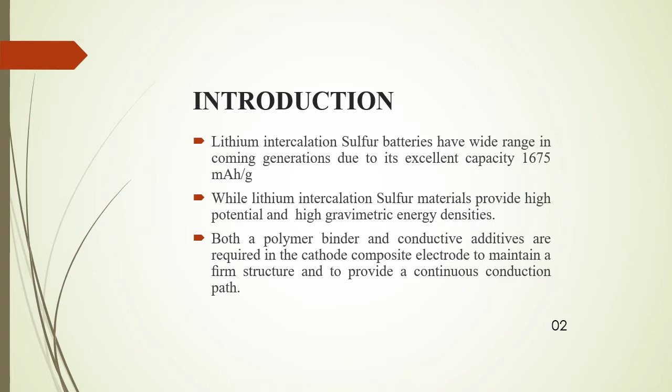So it works on the principle of a binder, which is a polymer, and conductivity additives, which I used is C65. And by combining all these I prepared the sulfur cathode to assemble the battery. So this is how it works, and let's see what the mechanism of the lithium sulfur battery is in the coming slide.

So this is the slurry preparation, in which we have four main points: active material preparation, binder material, solvent, and conductivity material. To prepare this slurry, we have four parts. So first we have to prepare the active material. I will explain how I prepared the active material for the lithium sulfur battery.

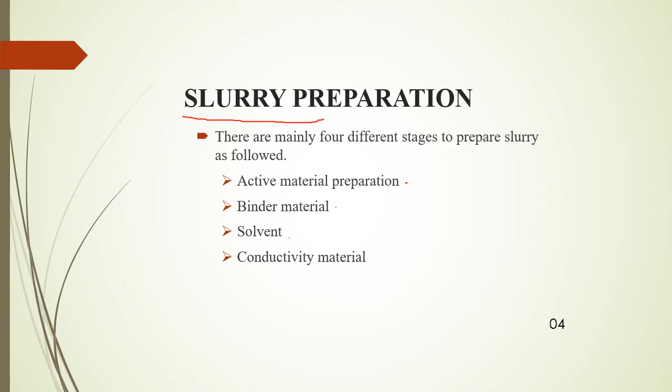In this active material preparation, initially I took carbon, which is ACS, and sulfur in the ratio of 3:7, and I blended it very well using a blender until the sulfur, which is yellow particles, was well mixed into the carbon particles, and then I used a furnace for 12 hours at about 155 degrees Celsius at 10 degrees Celsius per minute,

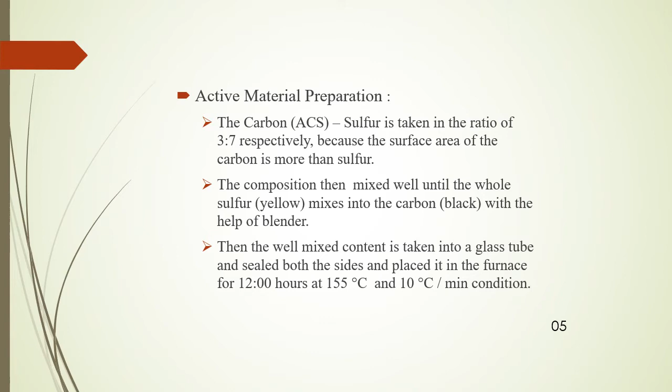rising temperature. In this condition, I used the furnace and kept the active material, which I blended homogeneously in the ratio of 3:7. I kept this composition in the furnace for 12 hours. After that, the above-mentioned binder material and solvent.

So finally the slurry. I prepare the slurry by combining all the above three in the ratio of 7:2:1, where 7 is the active material composition, 2 is the conductivity material, and finally 1 is the binder, for which I used PVDF.

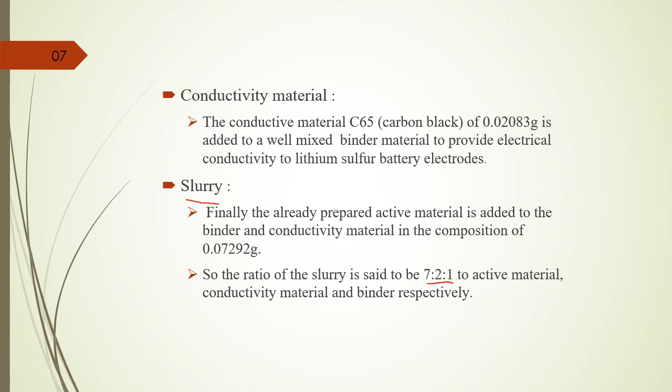So this is how I make the slurry, by using the mixer again for 30 minutes to mix this composition well, and we will get a sticky liquid type slurry, and I use that slurry in the further process. The further process is coating. Coating uses the slurry which I prepared earlier. I coat it on aluminum foil.

So I take aluminum foil of 20 micrometers, and the slurry which I prepared, I'll coat on the aluminum foil, and I use the scraper machine set to 80 mm diameter, and I coat on the aluminum foil using a speed of 15 mm.

The aluminum foil is allowed to stick on the scraper, and I keep the slurry I have prepared on the surface of the aluminum foil and allow the scraper to move over the slurry, so that the slurry is uniformly coated on the aluminum foil with 80 mm diameter, and we get the aluminum foil coated with the slurry.

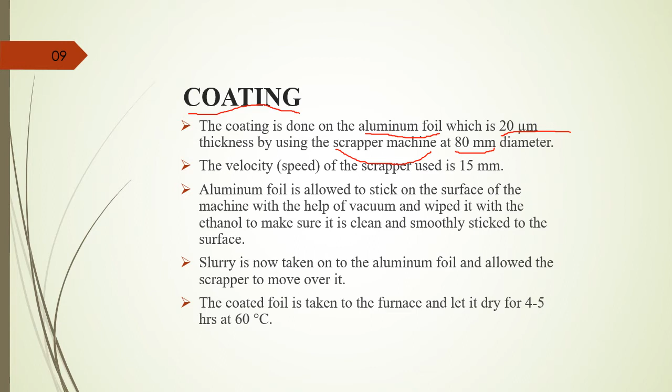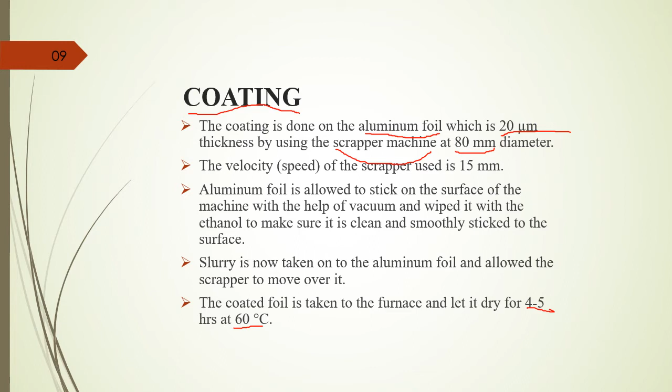So the next process is we have to keep the aluminum foils at 60 degrees centigrade in the furnace for 4 to 5 hours. So this is how the aluminum foil will be coated.

So the next process is rolling. I use a roller machine. Using the roller, I check the thickness at 0.45 mm, and the speed of the roller should be 5.5 mm. Each foil should be moved through the roller 3 to 4 times to make sure of the uniformity of the coating,

and then I punch the samples to cut them into round pieces, which I use in the coin cell assembly for the further process. So I cut the samples of coated slurry at about 13 mm. I use 13 mm size to cut the sample.

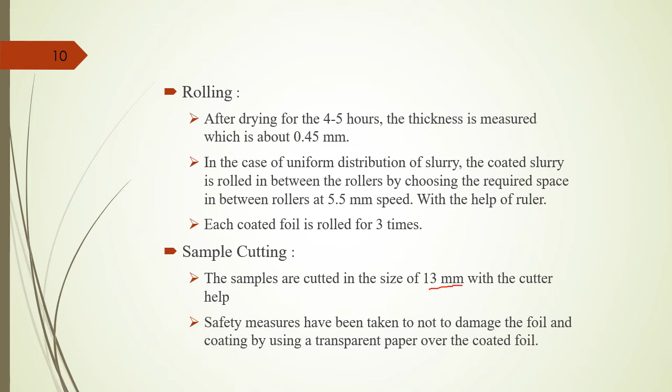Safety measures have been taken before cutting it, because it may damage the aluminum foil as well as the slurry coating over it. So I use a transparent paper over it to make sure no damage is done to the coating as well as the aluminum foil.

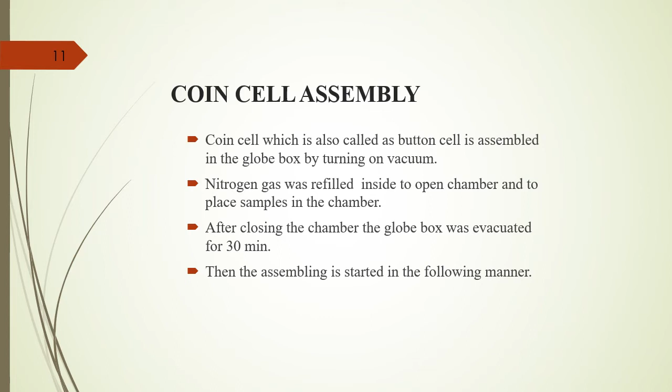So after the samples, the next step is the coin cell assembly. I assembled the coin cell by turning on the glove box with vacuum, and nitrogen gas is filled inside the chamber, and after that closing the chamber of the glove box, it is evacuated for 30 minutes. That's how the battery is assembled, in this order.

And up next we go to the analysis. So far we have prepared the battery with the cathode working material. The analysis is done at 0.1 and 0.5 C rate, which helps the battery to activate. But before doing this process, we need to stabilize the battery that we have prepared. So the battery is kept unmoving for 12 hours.

The slurry percentage I have used is 0.49, and the sulfur ratio is 0.7. So mainly we have to consider the theoretical capacity of sulfur here, which is 1675 mAh per gram, because here my working electrode is sulfur that I have prepared by using the coating process.

Many researchers usually focus on both anode and cathode, but here I focus only on the cathode. If we are focusing on both anode and cathode, we have to consider both the anode theoretical capacity, which is the lithium theoretical capacity, and also the sulfur theoretical capacity. But here I will consider the theoretical capacity of sulfur because I worked on the sulfur cathode, and I use the lithium foil directly from outside.

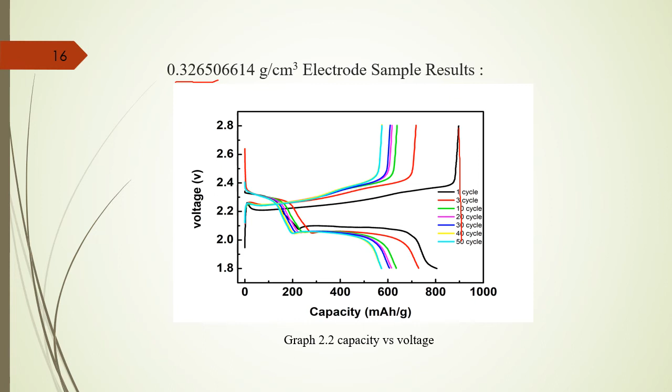The loading of this sample is even less than the first sample. So here are the results. I have also achieved almost 1000, but a little less than the first one. The reason is that I used very low loading for this sample, so I achieved less. Let's see the cyclic stability of this sample as well. Here the stability is almost the same, but a little bit different in Coulombic efficiency as well as cyclic stability. So these are the two samples.

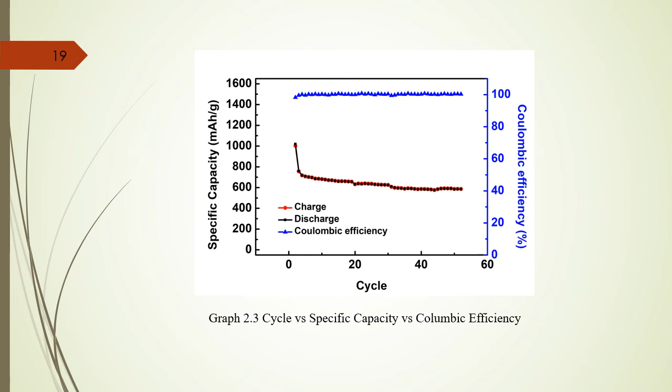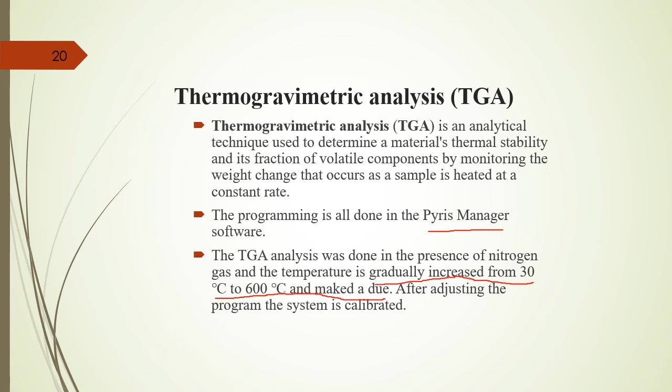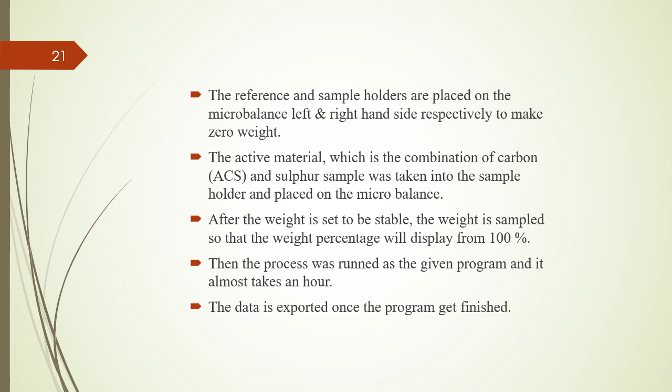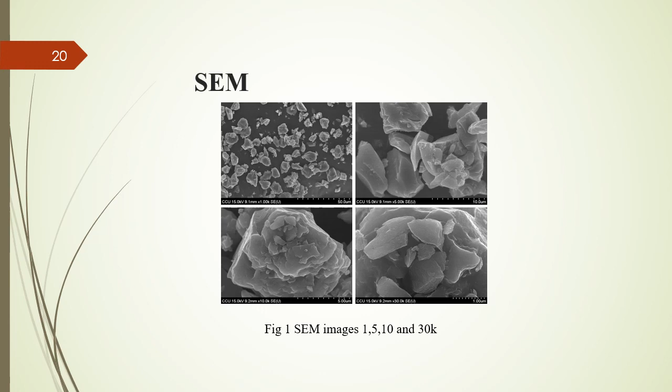So here are some SEM images which I have taken. These are at different magnifications. This is at 1K magnification, 5K. We can see the crystal-like structure, and the structure is very smooth. As we increase the magnification, we can see the proportion very clearly. Let's see another magnification as well.

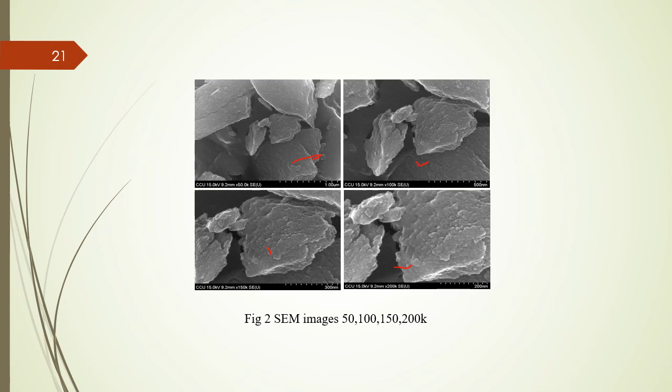So here are the SEM images at 50, 100. This is 50, and this is magnification at 100K, and this is 150K and 200K. So far the surface of the carbon and sulfur material, which is the active material, is uniformly mixed, and it was very smooth judging by this morphology from the SEM image.

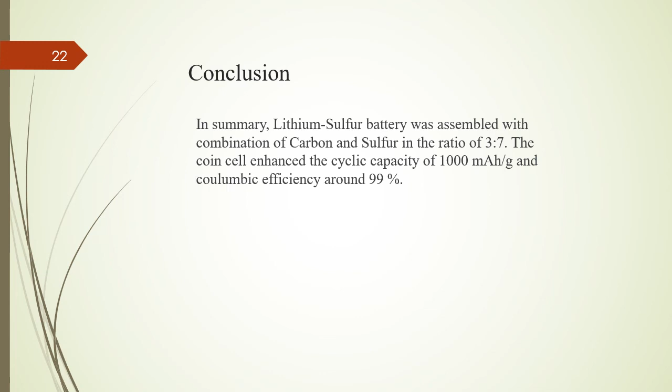So finally I have assembled the lithium sulfur battery and achieved 1000 mAh per gram specific capacity and Coulombic efficiency of around 99%, and the ratio I used is 3:7. So far the performance is good, but the stability of the anode is still not quite good. So in future work I am going to work on the lithium anode, whose stability is not so good. I am working on the stability now. Yes, that's my research so far.